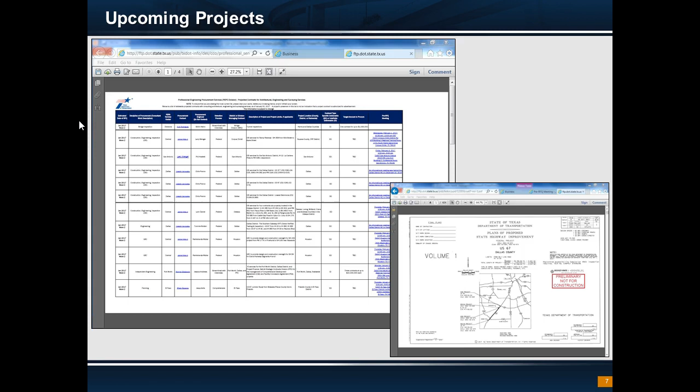If you're looking for work, most of this audience is in the consulting industry, so you probably already know this. But if you go to our website, TxDOT.gov, you click on the business link, and then there's a link for projected consultant projects. If you click on that, it'll take you to a listing of all the projects we've got coming out. That's design projects, that's CE&I, that's everything. Being that I'm in construction, CE&I is what I get into more often than not, so that's kind of my focus. In here you can find the projects that we're procuring on. There's a link off to the right where you can go and get more details on the specific project. You can actually even pull up plan sets, for instance, on the CE&I projects, and get really familiar with the specifics of that project.

So the current CE&I procurements that we have going on right now are on 3 projects: our Lowest Stemmons project, our 67 South project, our 377 and 2181 projects in Denton County. I'll go into a little bit more detail on each one of those projects here shortly. We also have an owner verification, testing, and inspection, or OVTI, contract for Southern Gateway that's in procurement right now. I think all 4 of these have been shortlisted, and they're very near to being awarded.

So a little bit about our methodology on CE&I. We have a metric that we run usually about every quarter, and we look at each area office's workload. There's a set number of inspectors per office, and we look at the inspection needs based upon current projects plus all the projects that will be coming up letting in the future. From that, we determine if the area office is going to have need above the number of inspectors it has. And when they do, that's when we go out and we seek CE&I services.

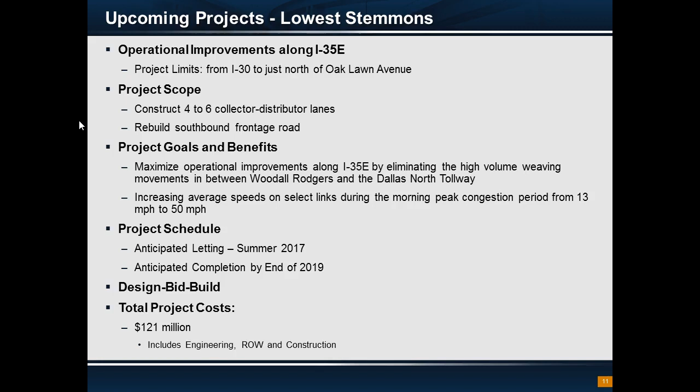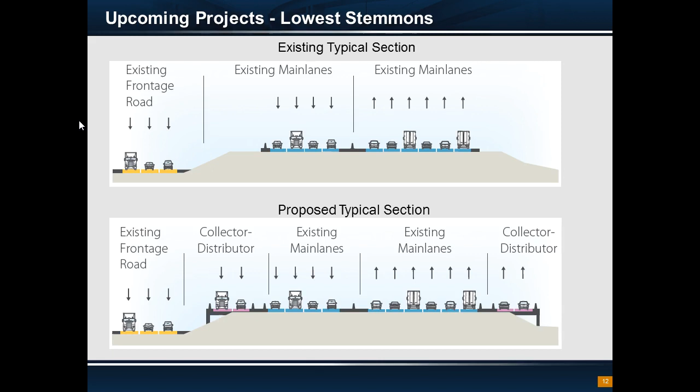So the schedule, we're anticipating letting this summer and completion by the end of 2019. It's going to be a design bid build, traditional project. And the total cost is $121 million. That's engineering, right-of-way, construction, all included. So here's the existing and proposed section. You can see the only difference between the two is we've got the 2-lane collector distributor built outboard of the main lanes there.

The next will be the 67 widening. It's actually phase 2C of Southern Gateway, but it was broke apart as a standalone project. It goes from 20 down to 1382 Beltline in Cedar Hill.

We're a pretty basic project. We're just adding a general purpose lane in each direction and also adding some ramp reversals and intersection improvements. So the project goal here is pretty simple: it's to add capacity. It's also a traditional design bid build. It's letting next month with a current construction estimate of $60 million.

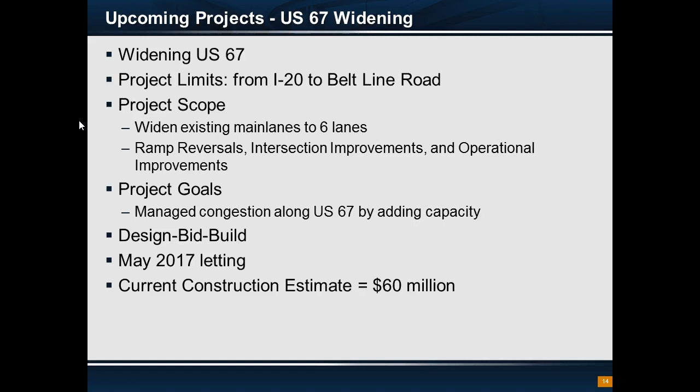So here, pretty straightforward, going from 2 GPs in each direction to 3. On US 377, up in Denton County, it goes from 35E down to south of FM 1830. This is one of our 2-lane rural to 6-lane urban conversions, probably one of the more difficult types of jobs that we undertake. The right-of-ways are pretty tight, and there's a lot of stuff to fit in there. There's also a railroad here - up towards the north end of the job, we've got the UPRR to deal with.

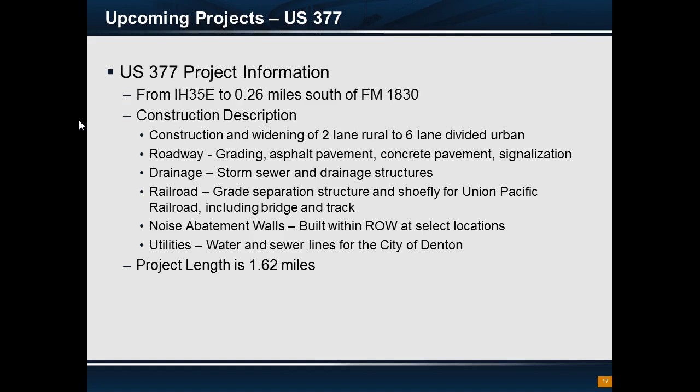Noise walls, utilities, project length's about 1.62 miles. We also have the 2181 job in Denton County, which goes from Lillian Miller to 2499 Barrel Strap Road. Same thing here - widening a 2-lane rural to a 6-lane urban divided and adding some left turn lanes. The goals here are to increase capacity, reduce congestion. Schedule on this project is to let in August, and we haven't set a completion date yet. It's also a traditional design bid build. Total project cost is $41.7 million with engineering, right-of-way, and construction altogether.

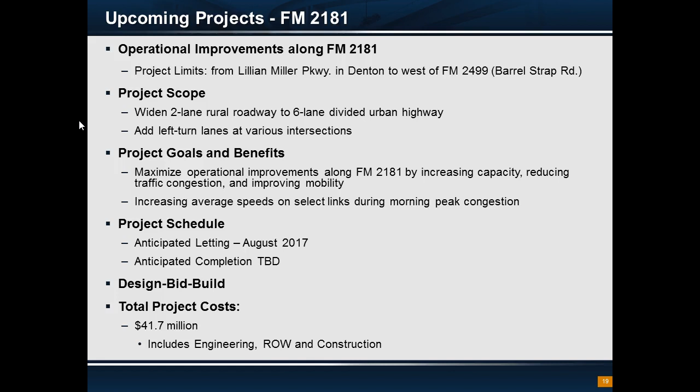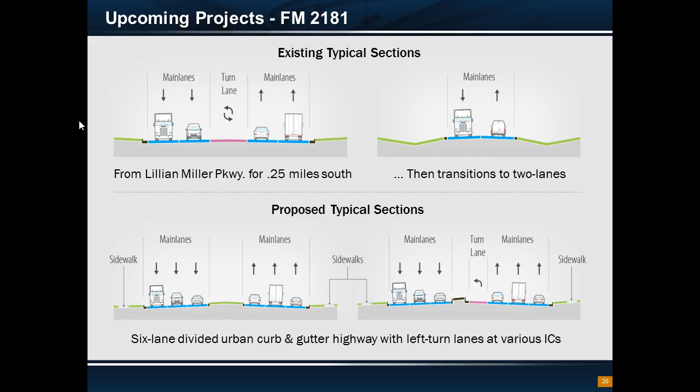So here's the existing section. On the very north end, you've got an urban section there, but it's a 4-lane with a continuous center turn. And then you've got the 2-lane rural to the south. That's all being converted over to a 6-lane urban section.

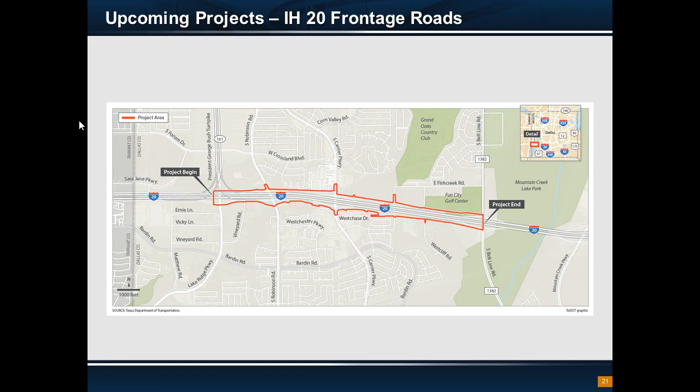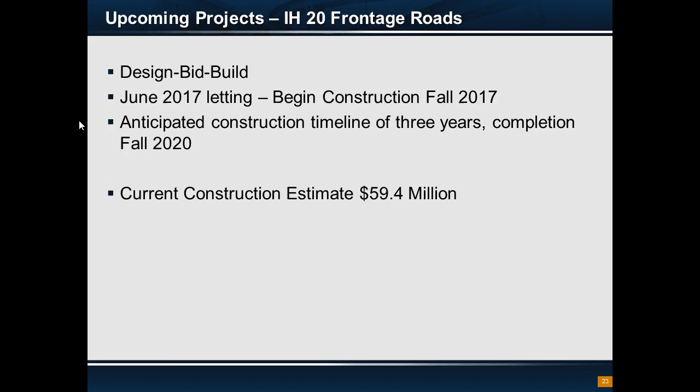Also, we've got the I-20 frontage roads. This is down from 161 over to Beltline. Basically what we're doing is we're constructing 4 to 6 lane frontage roads and modifying some ramps and some intersections. This is really an accessibility project. It's a traditional design bid build, and we're planning on letting it in June and beginning construction in the fall. We're looking at about a 3-year timeline, so we'll be finishing up that job in the fall of 2020. Our current construction estimate on that one's $59.4 million.

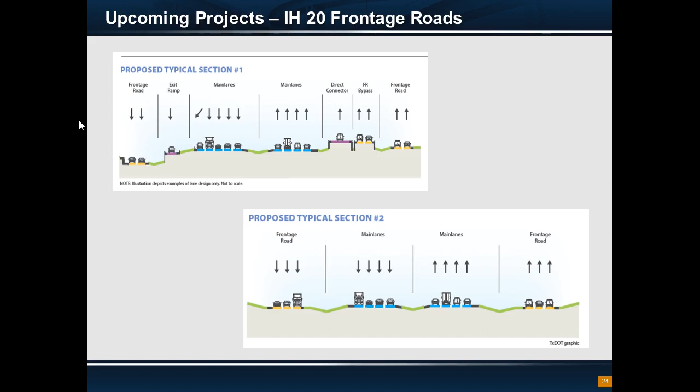Here's the 2 proposed sections. Basically what we're doing here is we're adding in the frontage roads - 2-lane frontage roads up in the upper left and the lower right 3-lane frontage roads.

So I want to talk a little bit about our OVTI methodology. This is going to our design build projects. Traditionally, there's a GEC involved. What we did on our horseshoe project is we had procured a PS&E contract, and then shortly thereafter, we got legislative authority to do design build. The horseshoe was a perfect example of a design build project, so we wanted to switch over. We weren't able to use our PS&E contract for everything that we needed on our design build project, so we had to go out for the construction aspects and get a separate contract. We called that an OVTI contract. This worked really well on the horseshoe, so we're extending that out.

We're going to do the same thing on Southern Gateway. The scope is really similar to CE&I. In design build, the contractor has the QA function, and then we have an oversight function as the owner, and that's what this contract does. It's really more focused on materials. There's a quarterly FHWA report that has to be provided, and it's really centered around the materials. So we're currently procuring the OVTI for Southern Gateway.

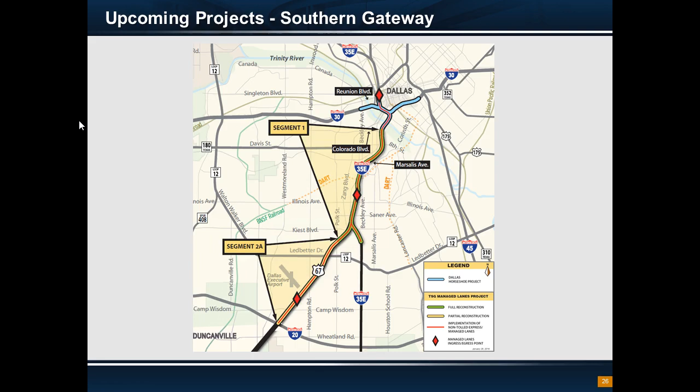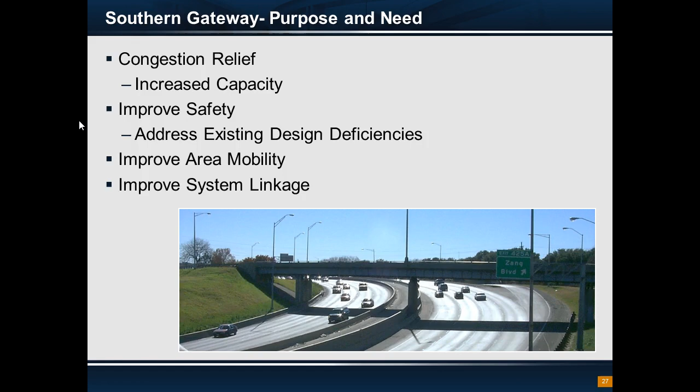So now to go into a little bit more detail on Southern Gateway, the project is broken up into two segments, Segment 1 and Segment 2A. Segment 1 runs from where the horseshoe terminated on the south end of Colorado down to the 35-67 split, and 2A goes from the split down to I-20. The point here is increasing capacity to reduce congestion and also improve safety on some of the design deficiencies that are existing. Improving mobility and improving system linkage also.

Segment 1 is 5.1 miles. It's a full reconstruction, and we're going from 8 general purpose lanes to 10, so an additional GP lane in each direction. We're also reconstructing the 1-lane reversible HOV that's existing today into a two-lane reversible non-tolled managed express lane. It's a lot to say, but what it means is it's a free 2 lanes, just with limited access. So for instance, in the morning, it'll be open, headed in towards downtown. You'll effectively have 7 lanes headed towards downtown in the morning and 7 lanes headed away from downtown in the afternoon. So I think it's a good idea.

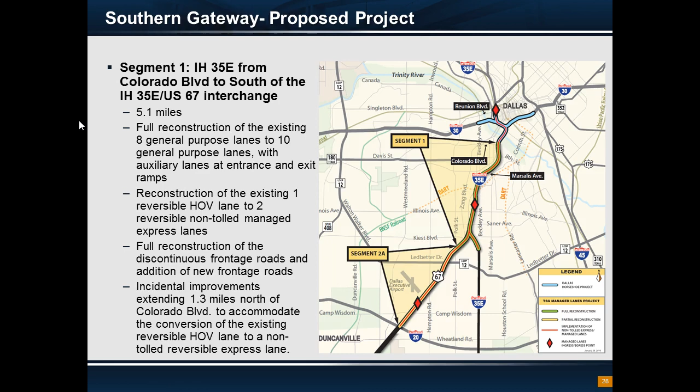On segment 2A, we're reconstructing the existing 2-lane concurrent HOV to a 1-lane reversible non-tolled facility, and we're also adding a general purpose lane in each direction on that south piece as well.

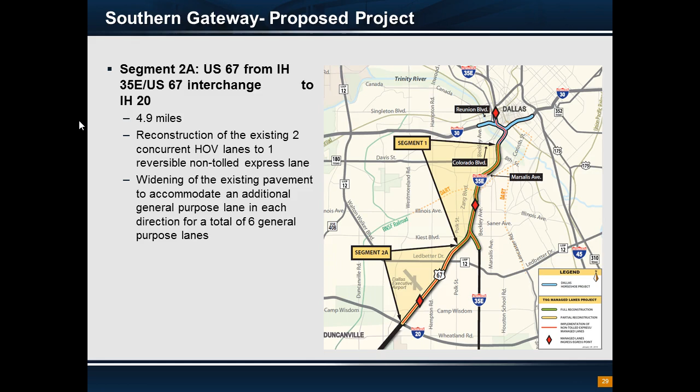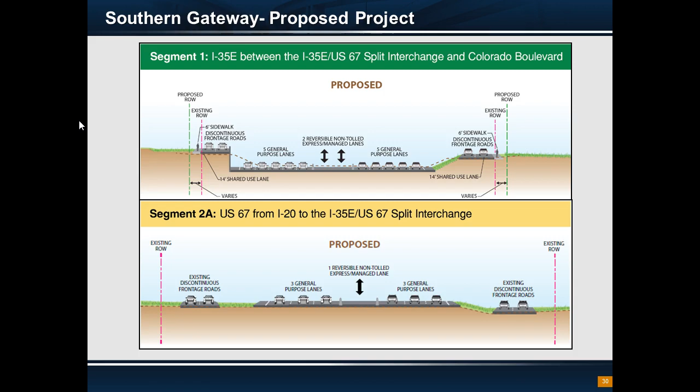So we're procuring it as a design-build. We issued the RFQs in May, received 5 qualification statements in June, and shortlisted to 3 proposers in July. Those 3 proposers are AGL, which is Archer Western, Granite and Lane; Pegasus Link Constructors, which is Fluor and Balfour Beatty; and Southgate, which is Kiewit and Austin Bridge and Road.

So this is the procurement timeline. You can see all this is in the past pretty much. In May we issued the RFQs, got QSs in June, issued the RFP in the fall, got environmentally clear, proposals were due in the spring, and now conditional award in spring of 2017. We're actually awarding at this month's commission meeting, and then we'll begin contract negotiations.

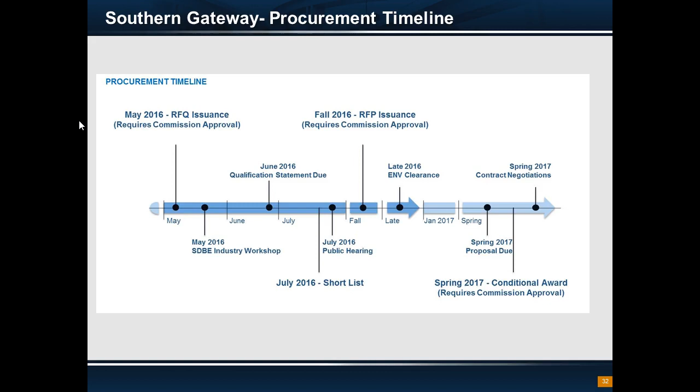So the estimate is $626 million for the job. That's inclusive of design, construction, utilities, construction management, QC, QA, just about everything.

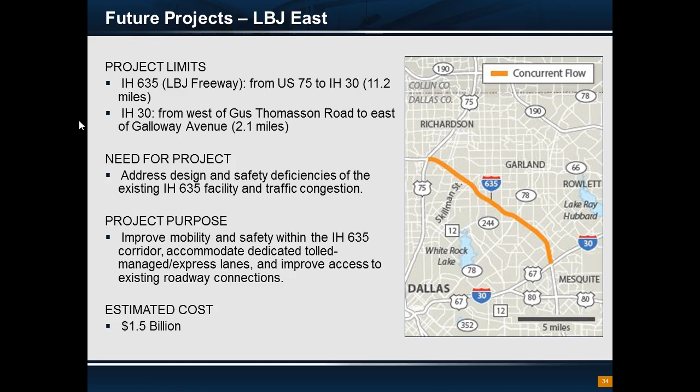So I want to talk about just two more projects that are on the radar coming up soon. Number one is our LBJ East project. It's on 635 from 75 to I-30, and also on I-30 from west of Gus Thomasson to east of Galloway. The need is to address design safety deficiencies in the existing facility, and of course the congestion that's out there on 635. So the purpose is to improve safety and add dedicated toll managed express lanes. Estimated cost is $1.5 billion.

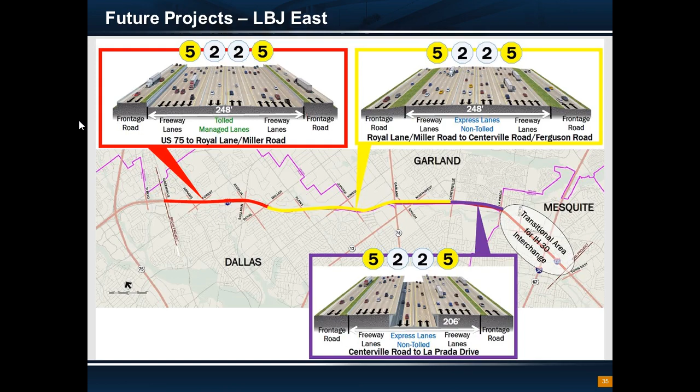So here's the proposed section for that job. We've got a 5-2-2-5 configuration on all three segments. On the segment from 75 to Royal Miller, it's actually a tolled managed lane, just like the TxPress lanes. But then from Royal Miller to Centerville Ferguson, it's non-tolled express lanes, similar to what we're doing on the Southern Gateway project — no toll, no HOV requirement either. And then we've got a transition section where we're actually cantilevering over a bit on the very south end.

So on the tolled managed lane section, the managed lanes will be open to tolling — it's a possibility. Minimum speeds will be maintained by adjusting the tolls according to time of day, just like in the TxPress lanes. And HOVs would receive a 50% discount if they register in advance.

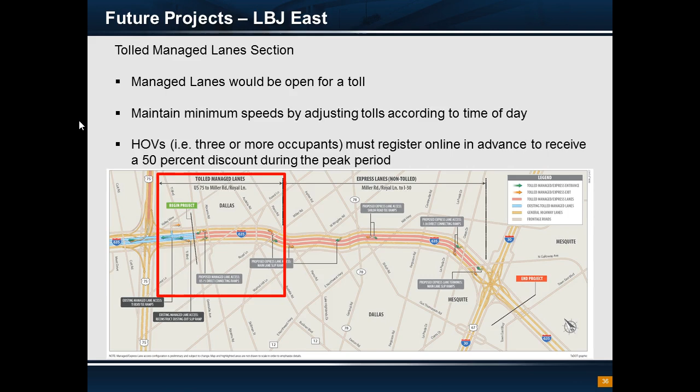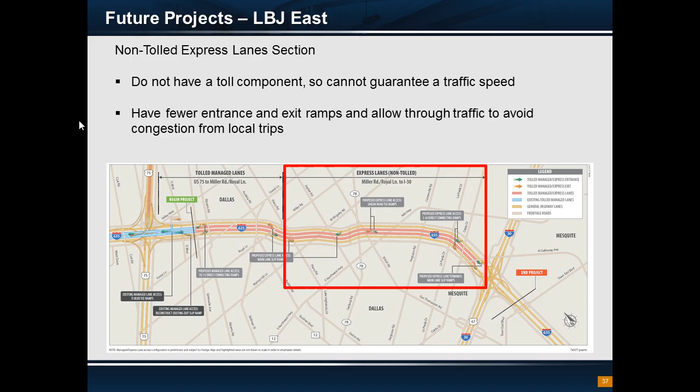On the non-tolled section, there's no toll component, so there's no guarantee of speed, and you just have fewer entrance and exit ramps, which would avoid some congestion in that managed lane.

One last project to talk about, and that's the I-30 frontage roads in Rockwall. It's from Bass Pro to west of FM 2642. There we're planning to widen to 4 main lanes in each direction from Bass Pro to 205, and 6 lanes from 205 to 2642.

We're constructing continuous 6-lane frontage roads from Bass Pro to 205, and constructing and reconstructing continuous 4-lane frontage roads from 205 to west of 2642, or the Hunt County line, and reconstructing the existing interchanges which haven't been reconstructed. If you've driven through that area, you know we've already reconstructed several of those interchanges. Estimated cost on this one is $552 million.

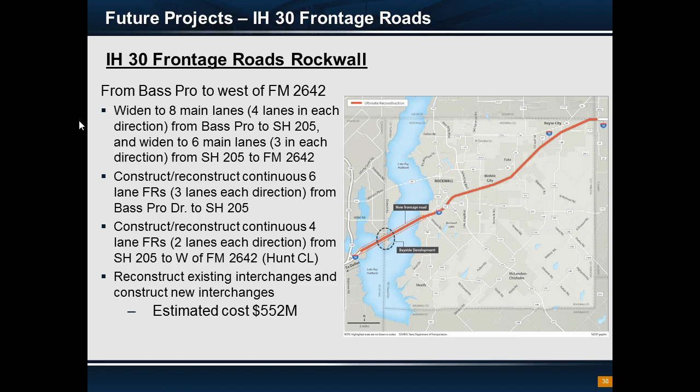So that's all I have for you today. I'd be willing to take any questions.

A question was asked about whether I-35 from the 67 split down to I-20 was included in the Southern Gateway project. The answer is no — that portion is part of the broader corridor, but it was not included in Southern Gateway due to funding constraints.

Another question: on the Southern Gateway project, are we staying within the existing right-of-way while adding those lanes? The answer is no, we're having to take some parcels. It wasn't a huge amount — I think in the neighborhood of 50 or so — not a major right-of-way take, but we did have to take some.